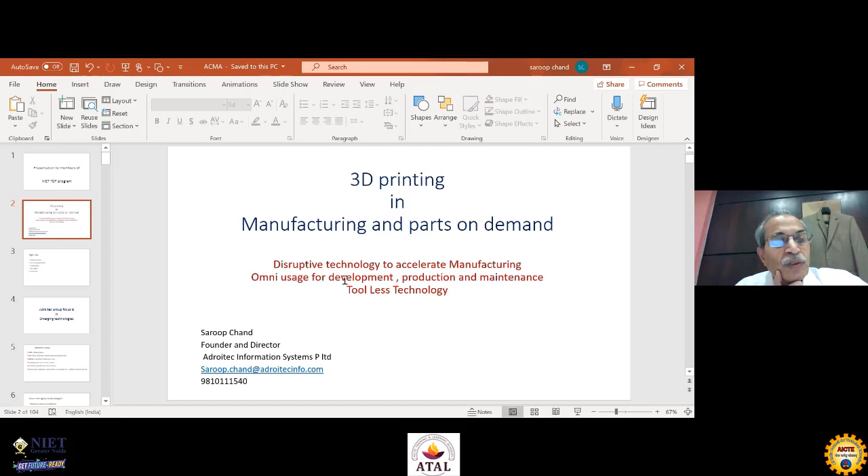So today's agenda, we will keep it as two slides on Adroitec, the 3D print benefits and why this technology has emerged, the technology by itself, use cases, and the different materials.

Just to give you a little background of Adroitec - Adroitec has been in emerging technologies, enabling customers to reap the benefit of new technologies and take a quantum jump in terms of growth. Today we are a team of about 300 people. We are a 30-year-old company, and we work from about 9 offices in the country, apart from 2 offices in Germany and the US.

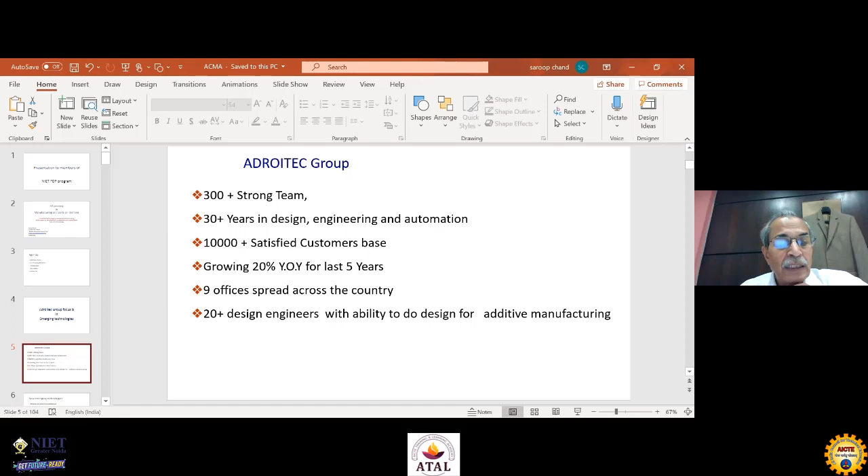Our areas of focus have been in robotic and smart manufacturing. Close to about 100 plus people work in the robotic and smart manufacturing area, where we work with companies like Ford, Daimler (Benz), and companies like GM for Opel, and some of the aerospace companies like Bell Helicopter, and Hardcore in terms of Space Application Center, India - all of them we work with.

We also have a full team which addresses the IIoT. In terms of hardware, we work with different PLC manufacturers as well as gateway manufacturers, and then work on software for ensuring that the protocols are robust and secure. We have even developed an IIoT server, so you can work on any web server like Amazon web server or Microsoft server or any of them. In addition, we can also provide a server by which the user can keep the data local, while also keeping it global.

We have been working in the IIoT space because many institutes find it very expensive to hire space on AWS or other web servers. That's why we created a facility by which the institute can create a server of their own, which can work as a global server and share the data so students can do projects in this area. We also developed 4 kits in IIoT for doing process plant, digital manufacturing, quality monitoring, and also a general kit so students can get experience in all these areas.

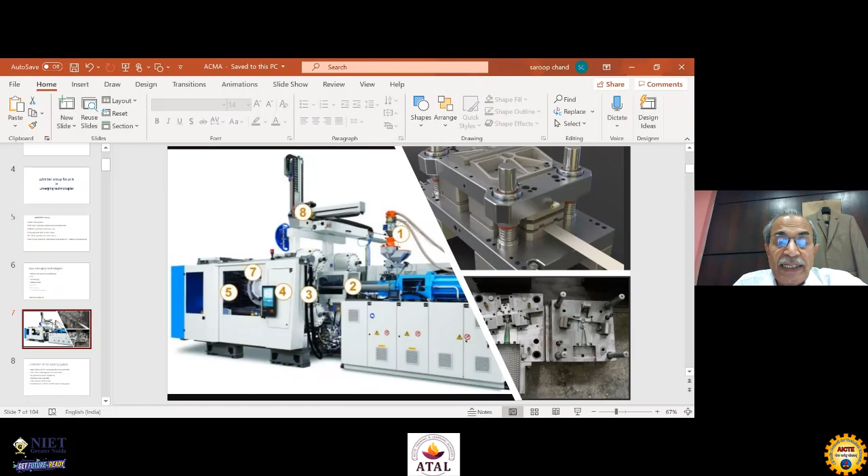These methods are very good for very large production quantity, but they are inefficient when it comes to small batch production, which may be 100, 200, 500 pieces - or it could not even be possible because the process is so traditional that in many cases it was not possible to manufacture or attempt lightweighting of the parts. So we will discuss how 3D printing is able to facilitate lightweighting, integration of parts, in addition to taking over the role of existing processes for small batch production.

The existing system also involved high capital cost for developing the die and mold, and practically I do not think you would have seen a factory which is less than 5,000 square feet where even a workshop is doing the manufacturing. Today in my office, I have about 1,000 square feet of area allocated only for 3D printing, and in that 1,000 square feet we are able to do production worth about 5 crores every year.

The lead time to develop the die and mold, setup time for part changeover - practically you had the minimum order quantity, trials and corrective action were required. Maintenance of die for the life cycle of the product was another big challenge, and they had to be stored.

Looking at the current need, the need is changing. The need is becoming more personalized. So there is a new word which has come in - mass personalized customization. So it's mass customization. Now the two words are opposite, but they are true - you need to address 100, 150, 500, 1,000 people, and the needs of the other group of 1,000 people is very different. Therefore you need to continuously do personalization, which means you need to modify your shop floor to be able to manufacture and deliver reliable product in a flexible and targeted system.

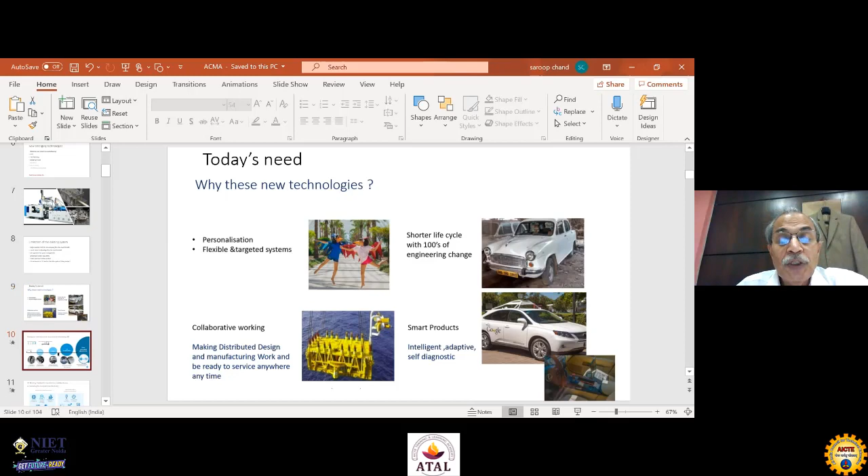With smart products, testing has to be done along with people specialized in different domains, yet they are putting the product together. This means my cycle time for 5 or 7 products to be launched has to be completed in collaboration with multiple streams of people, who may or may not be sitting at the same place, and the product may be serviced or delivered in a different country. All of this poses a big challenge in terms of supply chain, speed, and training people in repair of machines at different locations. So we have to reduce the whole time of prototyping, testing, physical working, and then launching.

That is called Industry 4.0. From the handmade and time-intensive system which started manufacturing, Ford introduced mass production and mass delivery with the same product being manufactured, no variation. There's a famous statement from Ford himself saying you can buy any color in my car range as long as it's black. That's what Ford did, which reduced the cost and improved productivity, but it was one standard product coming out.

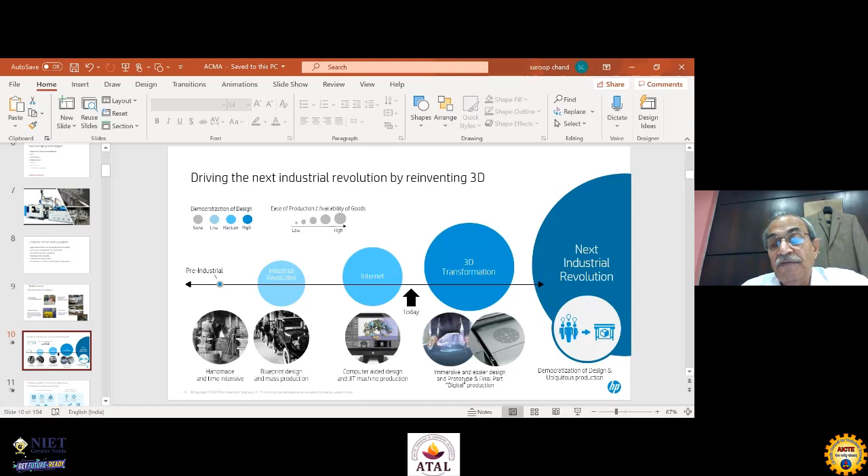Then came computer-aided design and just-in-time machine production, which helped in reducing cost and ensuring a little more flexibility. But today with smart products, it is changing to smart manufacturing, flexible manufacturing, which is leading to digital transformation.

All of this is being facilitated by tools like artificial intelligence and industrial Internet of Things, which can give us data related to the performance of the product from very far off places, and thereby we can build in more reliability in our products. At the same time, with so much data coming in from vehicles, consumer products, or machines, you need to store, analyze, and make sense of it to facilitate decision making. On the shop floor, to make it flexible manufacturing, we had no choice but to introduce robotics as a component of the flexible manufacturing system.

The fifth key technology is 3D printing, because with this you could print tools, jigs, and fixtures quickly. You could make prototypes, small batch production, and also produce spare parts for maintenance of equipment which has been supplied. It facilitates rapid innovation, and many of us working in colleges have seen a lot of incubation centers come up.

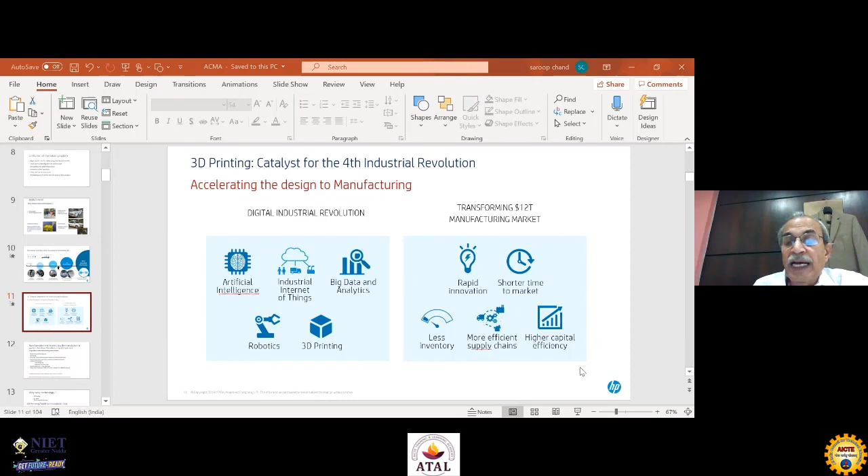At the same time, there's a more efficient supply chain built in, because you can transfer the data digitally and get it manufactured by a local manufacturer at that location. All of this adds to high capital efficiency as well as higher efficiency of go-to-market.

So in brief, it leads to reduced manufacturing time, no tooling, no minimum order quantity, trial of alternatives to get the most economic and efficient system, customized lightweight products, and integration of many parts—because now we don't have the problem of a tool or die hitting and compressing the liquid, where any undercut or overcut gets you stuck. But in 3D printing, since it's printed layer by layer and we're not removing anything, you can create very complex geometry as a single piece.

You can even provide hinges as a component, and by providing hinges you're able to integrate multiple parts. In fact, complex geometry is a big advantage in the 3D printing world.

Let's look at the trends. If we look at the trends, it's being used by motor vehicle companies, for aerospace, for industrial business machines, for consumer products—and I just attended and gave a lecture at the medical forum.

It's now being used practically across the whole medical stream, whether it's neurosurgery, dental work, or planning heart surgery—almost everywhere in medicine, apart from standard things like audiology, aligners, or prostheses, which in any case are being made using 3D printing nowadays, because every human being is individual—there's no mass-produced shape or geometry for a person.

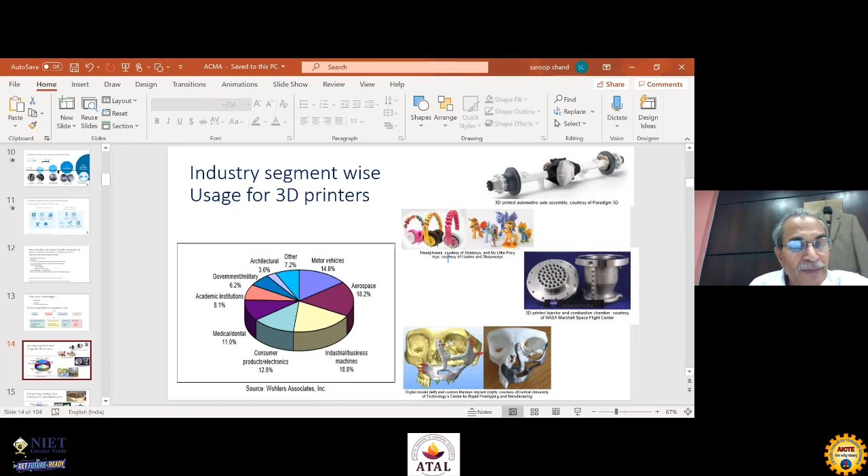It's being used for different applications. Typically, all of us know it for fit and assembly or presentation models. But now it's being used for patterns, for prototype tooling, and for patterns for metal casting, such as sand mold casting.

It's being used for tooling of components. It's being used directly as functional parts and as a visual aid.

You can see on the right side different examples of 3D printing, from a soft mold to a complex mold where the cooling channels are curved rather than straight lines. Previously, all channels used to be straight because drilling was the only process available, but no longer.

With 3D printing, you're able to bring the cooling channel very close to the part. And when you bring it close in a direct way, it gives higher cooling efficiency, and at the same time doesn't create uneven cooling, which used to lead to distortion in the shape of the parts.

Across the world, it's been adopted extensively. Even in Asia Pacific, if you see, it is same as North America. Unfortunately, India has been slightly slow in adoption, and we have less than 0.5% of the global market. But I think it's very soon catching up. China has adopted close to about 10%, and even in Asia, it is close to 3.2%, which means globally, India is only at about 0.5%, which is very, very low.

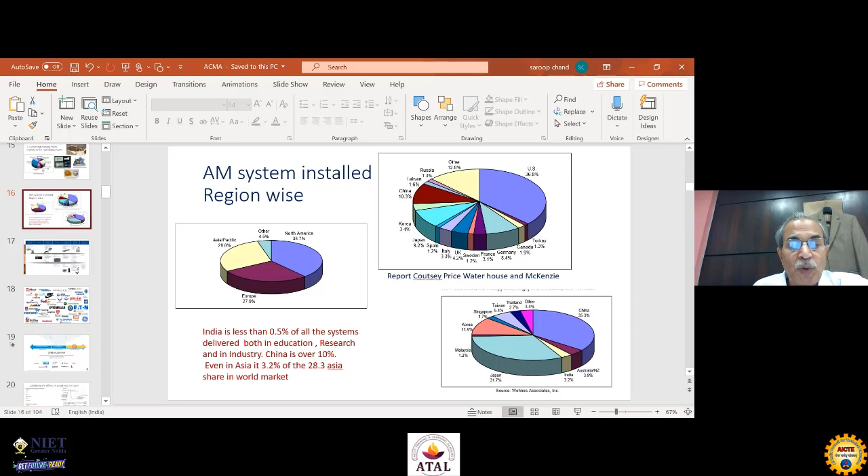Brief of how it is being used in different industries. It's being used in military and defense. So practically all drone manufacturers are today using the 3D printed parts because they are lightweight, they can be in small quantity, and they could be modified very quickly to be able to give the shape to the drone. It's being used for exoskeleton, for transferring the weight from the back to the foot, and it's also being used for many other areas in defense, for equipment manufacturing, equipment testing, because you can work with even material like titanium on this.

We are working on a project which is working on cryogenic system, and also a project where we are developing a silicone mixed clay by which you are able to take the temperature very, very high, and which could be used on the top of the missile as a part of the work.

It's being used in aerospace for making whole lot of jigs and fixtures. So a customer like Space Application Center is today using 3D printed all jigs and fixtures. The parts are not tested for flying in the air. It would take its own time, but are they capable of flying in the air? They are very much capable of flying in the air, but the process of testing and evaluation is a 3 to 5 years time. But at the end of 3 to 5 years, there will be plenty of usage of 3D printing in the aerospace industry.

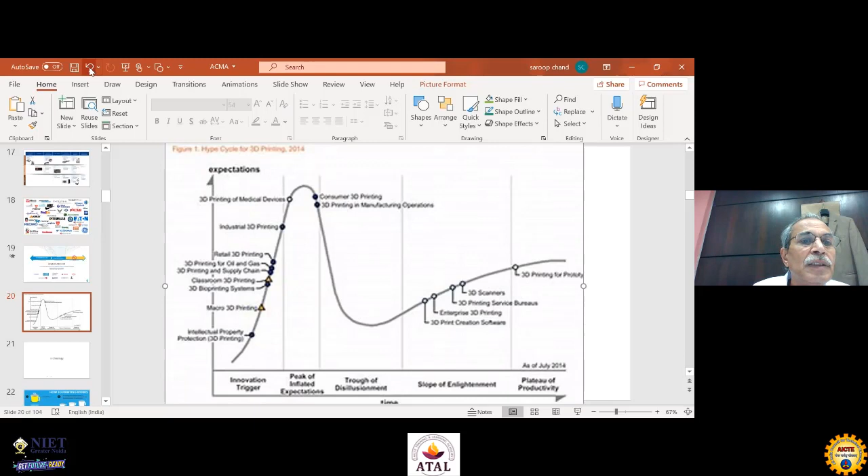So this momentum is not just because the 3D printing technology has grown. If you look at it, the hardware companies like HP, GE, DMG, Stratasys are all big companies which started doing 3D printing. Material companies like BASF, Henkel, Arkema, DuPont, Lubrizol, Evonik, and many more started developing material. Software companies said that 3D CAD is fine, but now we need to do design for additive manufacturing. And companies like PTC, Siemens, Dassault have all developed modules for design for additive manufacturing, which take care of the lightweighting, integration, and many other things which add great value in terms of a new process of manufacturing.

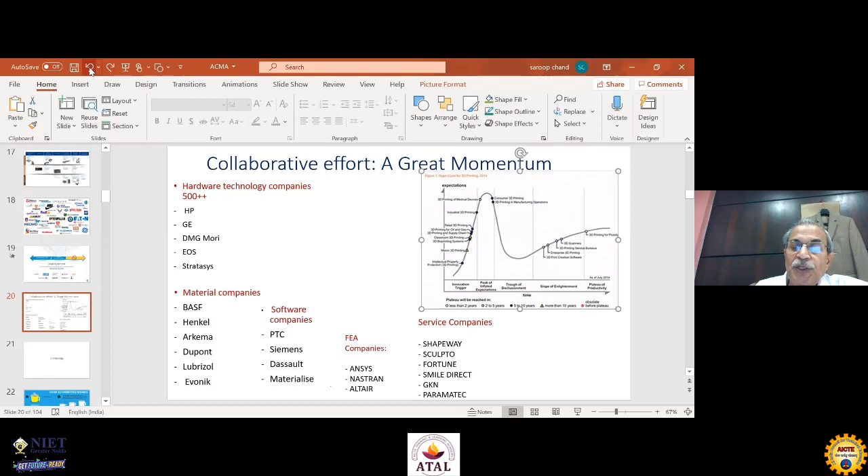FEA companies like ANSYS, Nastran, Altair started developing software, because who will do the simulation and check the reliability before the part is used in the actual sense? And like it happened with the photocopier, initially there would be a lot of support companies which would come in who will do the manufacturing rather than the end user buying the equipment, which is what has happened with companies like GKN, Shapeways, Sculpteo, Fortune, who have now invested in 20, 30, 40, 50 machines to be able to produce the parts for various people. Let's look at the technology.

So what happens is you print one layer and then the bed either goes down or the bed goes up on which the print has been done, and a new layer is printed on top of it. That new layer adheres to the previous layer, and since it attaches to the previous layer and in many processes it fuses with the previous layer, you are able to produce the part like a cup layer by layer and thereby create the product on which you can do post-processing, painting and things like that.

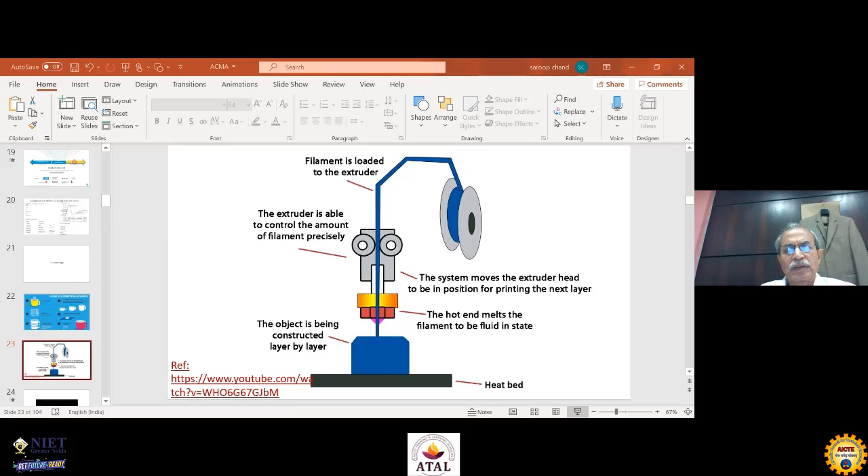Can you see the screen? Hello? Yes, sir. Yes, sir.

It is visible. Okay. So if you see the screen, there is a roll in which the plastic material, which could be PLA, ABS, HIPS, any of these materials, comes down, directed by the pinch rollers, and then moves down onto an extruder. This extruder is a heated extruder. So typically for a material like ABS, it would be heated to a temperature of about 270 degrees.

By doing that, you are able to melt this material which was coming in the form of a wire and then print it out. Now, when I say print it out, what does it mean? It means basically the model which was there, as you saw it in the form of a cup, when a layer is sliced, it is almost like writing it down on the previous layer, or in a CNC process, the G code gets created, and for that layer, the tool moves.

In this case, the extruder moves on the Cartesian coordinates to be able to extrude the material only at the places where the extruder is moving and thereby create the geometry. Let's have a look at it.

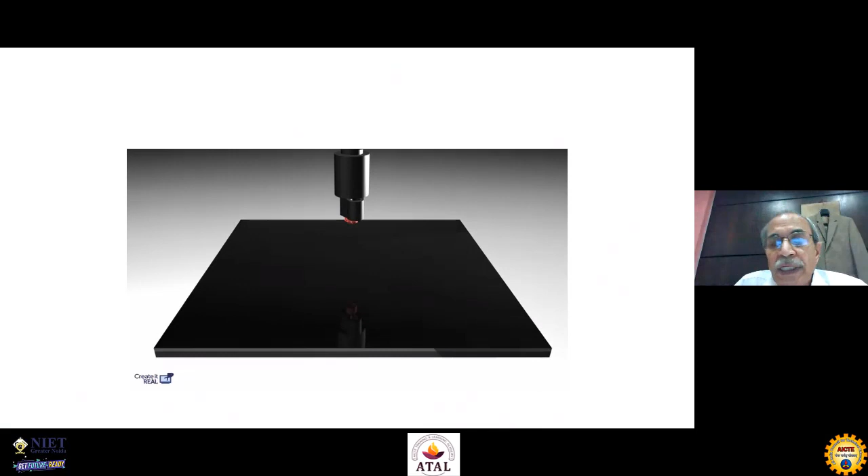In this, can you hear it? The voice? Yes, sir. Okay.

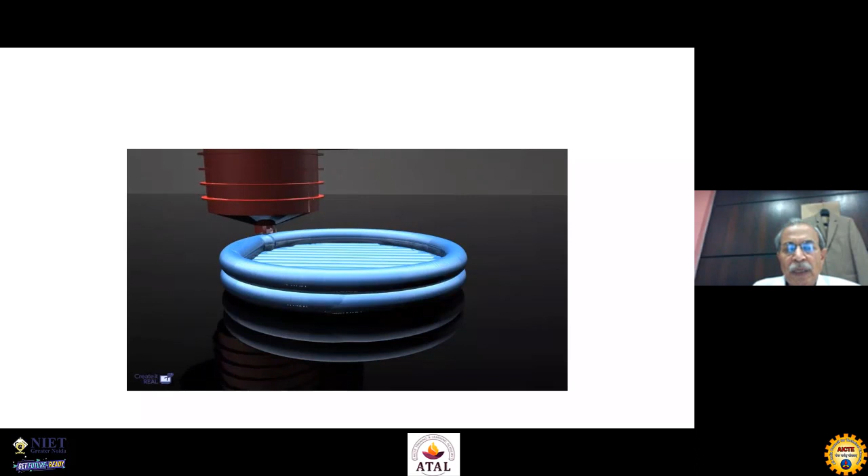So the plastic is coming down, melts, and you're printing it out one layer at this point. And you would observe the bed goes down, next layer. The orientation.

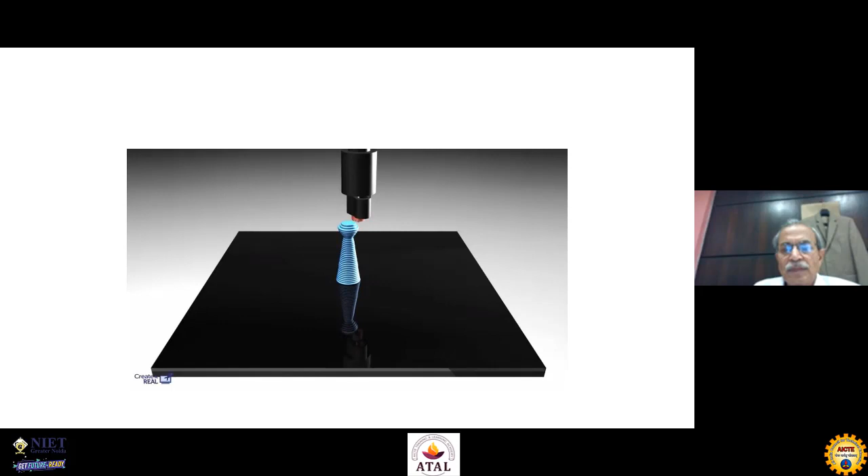So you saw the basic system. Now this was called the FDM technology. Now the Cartesian coordinate is critical. The extruder is critical. Some way of melting the plastic is important, or a metal. The same principle of layer by layer printing is adopted in all technologies. So 3D printing is nothing but layer by layer manufacturing.

So there is a second technology which is called SLA printing. In SLA printing, instead of moving the extruder on a Cartesian coordinate, there is either a mirror or a lens combination, and a laser or a light source comes in and hits the mirror. This gets directed, and this mirror is the one which gives the orientation so that the geometry or the G code can be followed.

So here you fill a tank with a resin, and this resin is photosensitive. So it can be cured as soon as the light or a laser falls on it. At that spot, it gets solidified. Otherwise, it's a semi-viscous material. So being a photosensitive material, it gets sensitized and thereby starts producing that layer at the place where the laser is defining, like a pen writing on top of the resin.

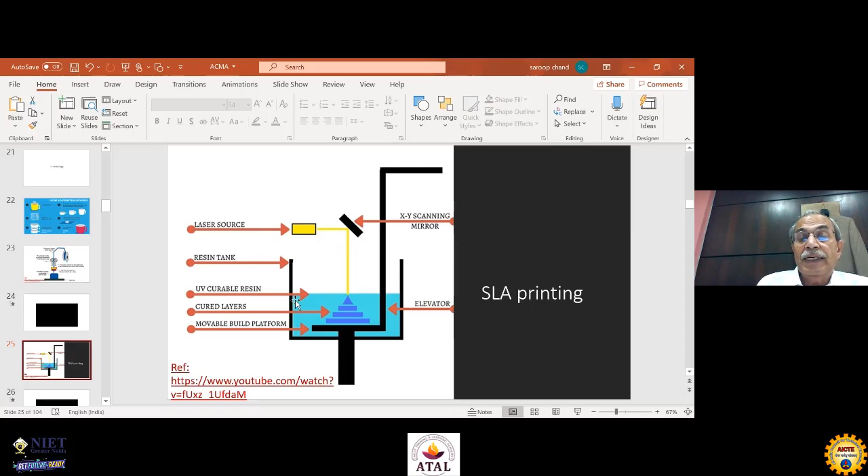So having done that, the bed either goes down or the bed goes up, and then you get the second layer and third layer and fourth layer, and thereby the product gets produced. Let's have a look at it.

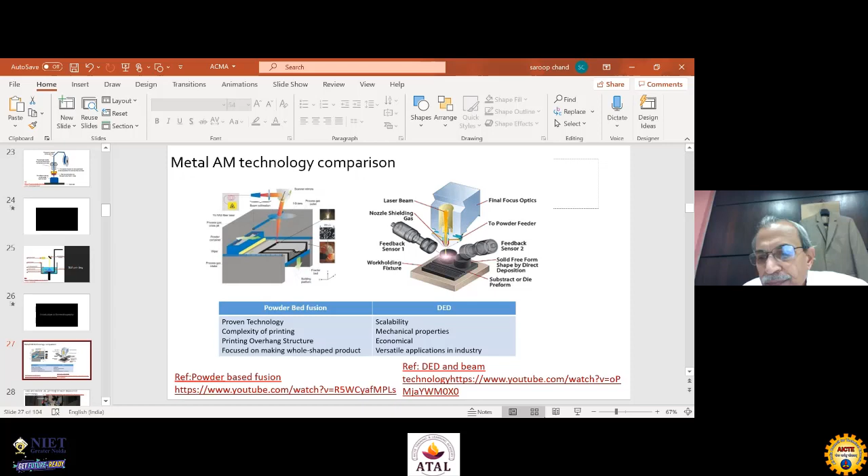Here you spread the powder on the bed, and this powder layer can be 50 micron, 80 micron, or even 10 micron thick. Then, as in stereolithography, the laser comes in, gets reflected, and creates a spot which hits the powder. Since the laser carries a lot of energy, it melts the material, whether it's metal or plastic. Depending on what powder has been spread, we use the laser corresponding to that, so it can be as high as 2000 watts, but typically you use 100 to 200 watt lasers. With that, you create the geometry on the powder bed, then the bed goes down, a new layer gets coated, and the same process is followed as per the geometry.

In this, the limitation is, one, maintenance of the laser is a bit of a problem. Two, the moment you have used one type of powder, changeover becomes a challenge, because you have to clean the whole machine since the powder has been spread all over the place, and that cleaning becomes a bit of a challenge.

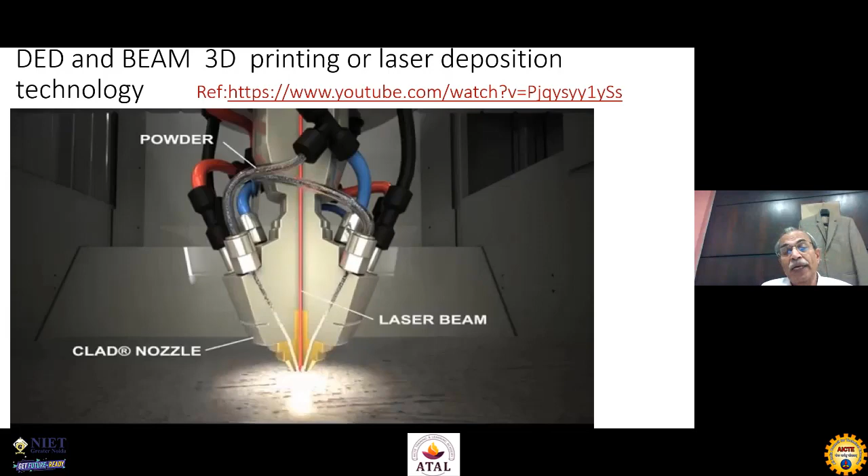In case of metal, you have to take a little precaution, because metals do get oxidized, and since they do get oxidized, you have to provide a neutral gas like argon or helium while doing the printing. In metal you need this, but in plastic you don't need it. So let's look at how it works.

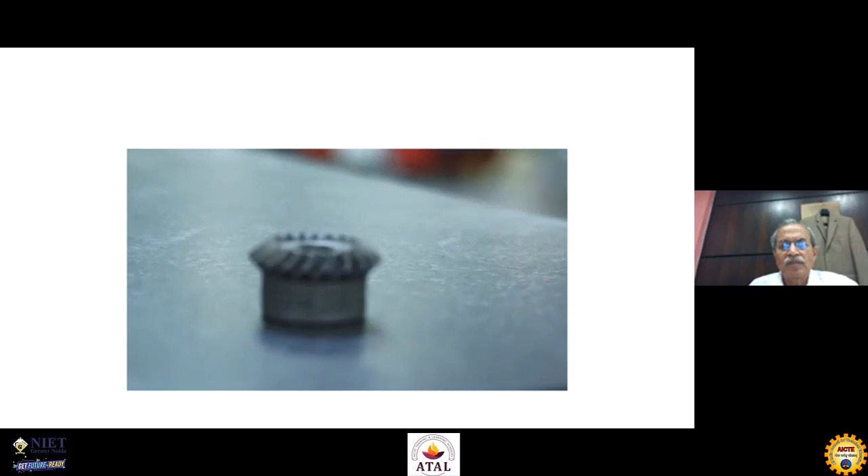But now it is being adopted and gradually moved to functional parts, and more importantly, production parts rather than only prototyping. So a company like HP, who launched the product about 3 years back, relooked at it and asked, what can we do with the laser? They created and used the technology they are best at, which is inkjetting. So they created about 15,000 nozzles on the bed like this.

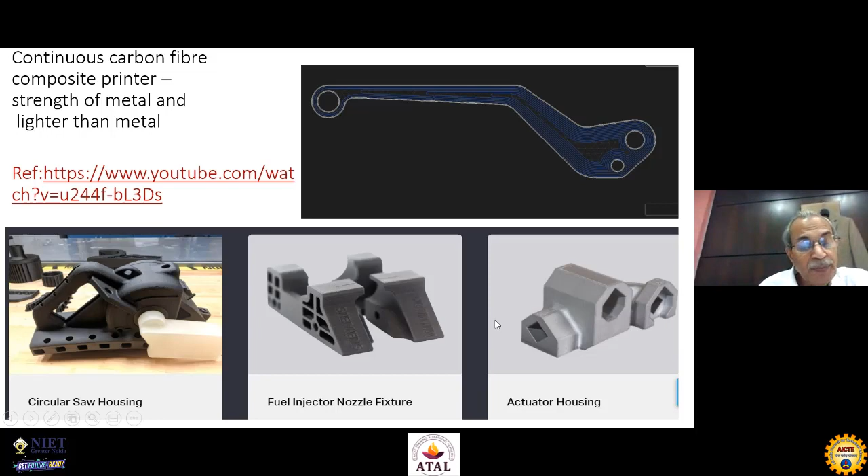In metal, the technology you saw and this technology becomes almost like a desktop setup. Here is a metal wire acting as a support wire. You saw the guy clipping it out with a clipper, or sometimes a CNC machine if the joints are very strong. But in this case, they do the printing on the bed like an FDM with the metal material and envelop it with a small plastic so the parts remain stuck. This technology is well proven in metal injection molding technology.

You normally put a small adhesive in the metal powder while producing the part, and that is called a green part. For creating support where there is an overhang, you would typically do it with either the same material or a different material. But in this case it's the same material, except between the support and the part there is a ceramic layer which gets laid. Since this ceramic layer becomes brittle when sintered and can be broken, all the supports can be removed without any CNC operation or hard work in clipping them out. So it was a marked improvement over what was being done in metal.

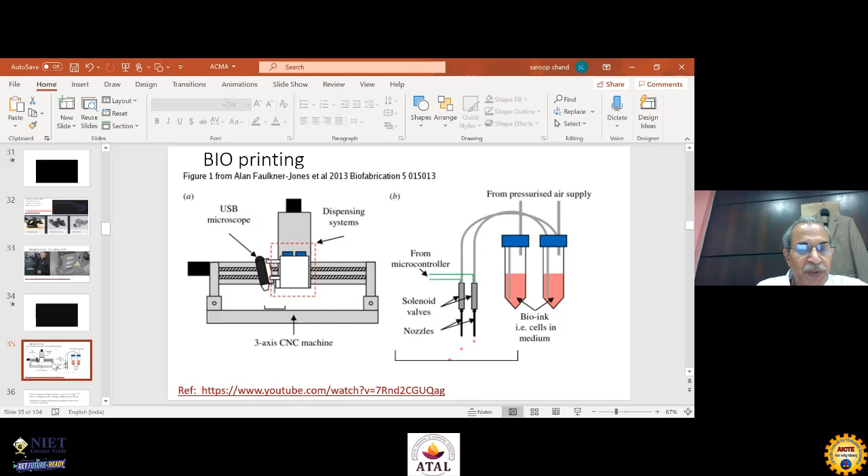We all know how the integration of mobile communication, computers, and internet led to the smartphone, and what a large market it opened—whether for app developers, manufacturers, maintenance people, or sales staff in shops, where a large number of people are employed around this new technology called the smartphone.

And when did it happen? About 15 years back. In that time, it created employment for close to 30 million people, 30 million youth having been employed.

Even you and I ask our son or daughter, who is young enough and experienced enough with smartphones, to help us use different apps. If it can create that much impact on employment, I think 3D printing, which is affecting a $16 trillion market—not a small market—will have a large scope for growth.

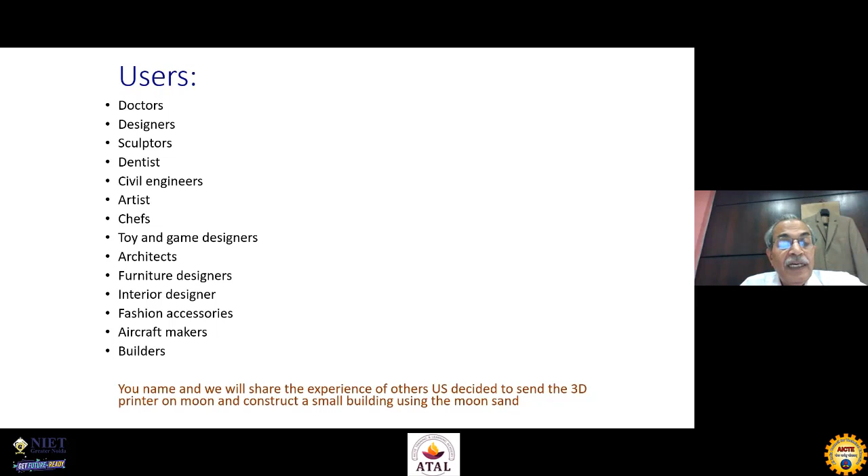So let's look at it - who are the users? Doctors are using it, designers, sculptors, dentists, civil engineers, artists, chefs, toy and game designers, architects, furniture designers, interior designers, fashion accessory designers, aircraft makers, and builders. And of course consumer goods and all those things. Take any example and you would find at least 20 people using it in that industry.

There are two bones, so you have one spare bone in the foot. This bone is cut precisely as per the shape of the jaw, which is personalized to every individual - no two people have the same jaw. With that cut, they are able to do the surgery. Previously, they had to do this after taking out the bone, cutting it based on measurement. Now with the CT scan, they can check it up, do the planning, create the fixture, so that as soon as the bone is taken out, they are able to cut it with the saw, and that is used for the jawbone replacement.

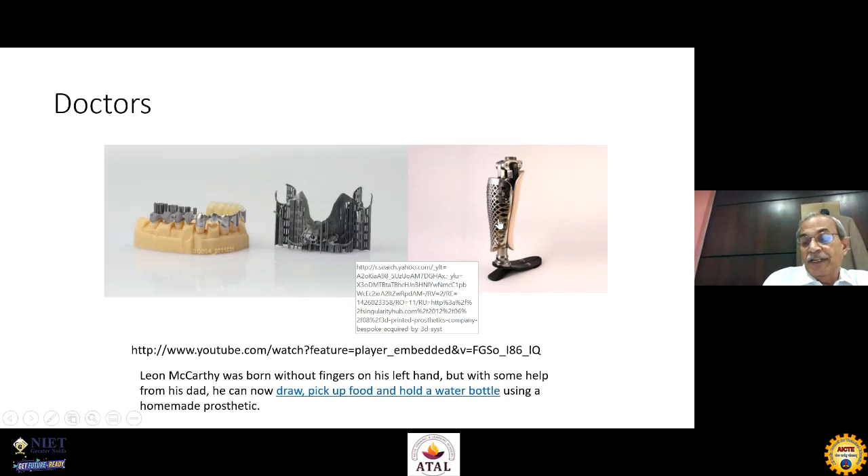Cake printing, I could do direct food printing using different types of material, including the dough, and using the syringe as my extruder, I can push the material and give shape to my output.

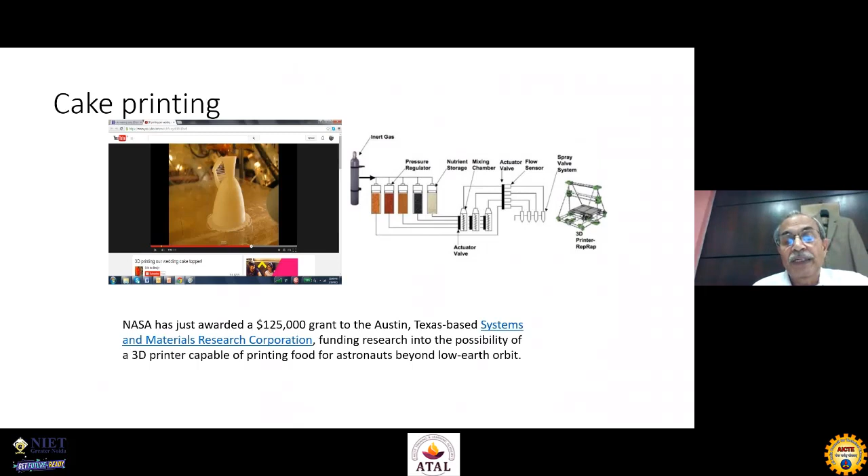Can I create my customized cups? Can I create my customized glasses? Can I create my spectacles or my child's shoe? All of it is possible using 3D printing.

Globally, it's being used by various sculptors to create the cast and then do the sand mold casting with the help of it. You have seen the statue of Sardar Patel. That was all designed by one of the artists, the sculptorist in India, and after doing the designing, the same was given for casting using the 3D print output.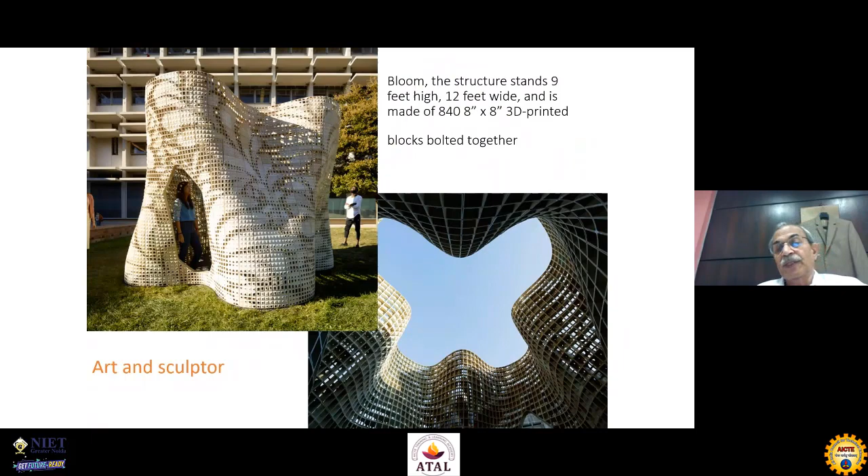Can I create my toy which is personalized to my child? Yes, I can, because I can scan the face of my child, use it for doing the 3D modeling, and after the 3D modeling, I can print it using a soft material like silicone, in color, and that becomes my personalized toy.

Architects have used it extensively for creating the model, sharing it with the client, getting approval rather than 2D drawings, and then talking about the different planes from where the person needs to see it. Typically, reconstruction in an architectural or civil world is close to about 3 to 5% of the expenses. With the help of 3D printing, they are able to avoid it because you are actually showing the miniaturized house or building or structure before the construction actually happens.

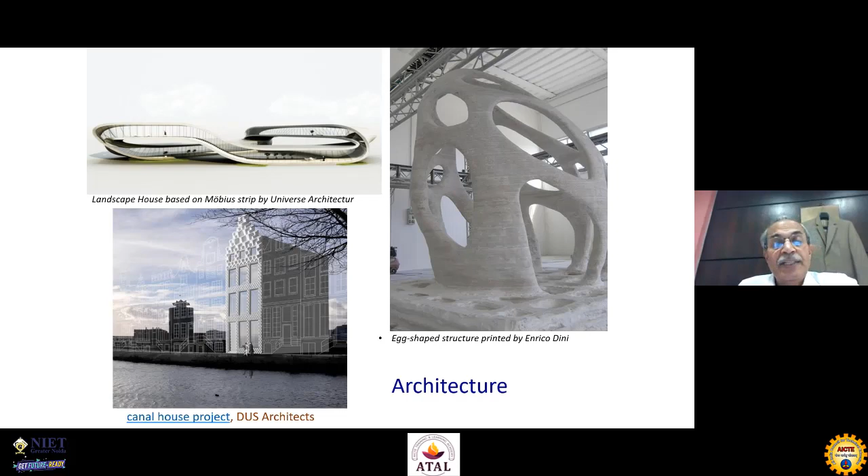So many of us have heard about a house which has been made in less than 3 days time, an 8 meter by 8 meter house, using the 3D print technology.

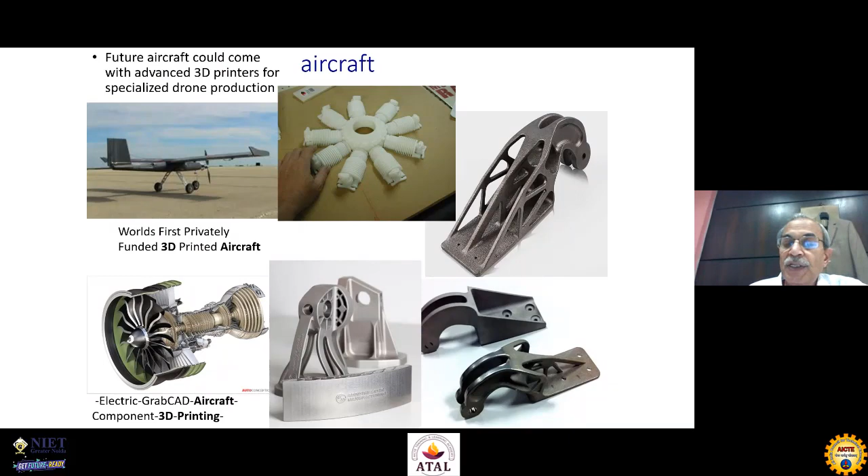Now, having reduced the weight by 125 grams, and if there are 300 seats and each seat requires 6 pieces of it, right? You can well imagine you're talking of 800 grams per seat, and 800 grams means 300 seats is close to about 240 kilos. 240 kilos means a whole lot of fuel saving. One of the companies which started using even the belt buckle or a seat structure like this was able to save close to about $100 million per year just by redesigning and reworking on the seat holding and the buckles.

Organizations like the National Institute of Fashion Technology in India, and globally various fashion designers, have started using it as an accessory developer — customized shoes, customized belts, customized rings, customized necklaces, and many other things to be able to define and give shape to their dreams. Some of the examples I'm sharing with you.

It's been a challenge for them to create and be able to present their ideas to the world, but with the help of 3D printing, you are able to do that. So there was a show which was done in Bombay about 2 years back, where all the clothes and all the accessories were designed and made with 3D printing, and a full fashion show was held.

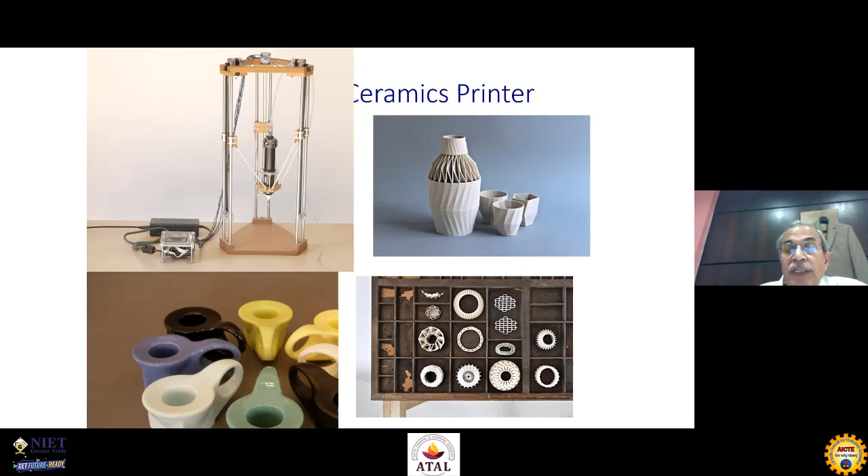You could use ceramic for doing the customized material and customized consumer products. Let's move to the industrial application. If you look at the industrial application, typically you would make a pattern using wood. Now, with wood, there are very few artists who can actually cut the wood in this shape, and that would have to be maintained for a long period of time because the wood absorbs water.

Using 3D printing, you could make it in PLA or ABS, and use it for casting applications for sand mold casting. Of course, you would have used the same sand remover and all those things to give it a finer finish. A panel manufacturer could construct the panel, fit it in and test the whole equipment with the help of 3D printing. Now, does it have to produce one piece by one piece?

No, it's not necessary. Our production machines like HP are able to produce a large volume of parts in one go, and not only one type of part, which was the limitation of the existing system, where you had to set up a die to produce one type of part. In this case, I could actually create a bed or a box with multiple parts of either the same type or of multiple types.

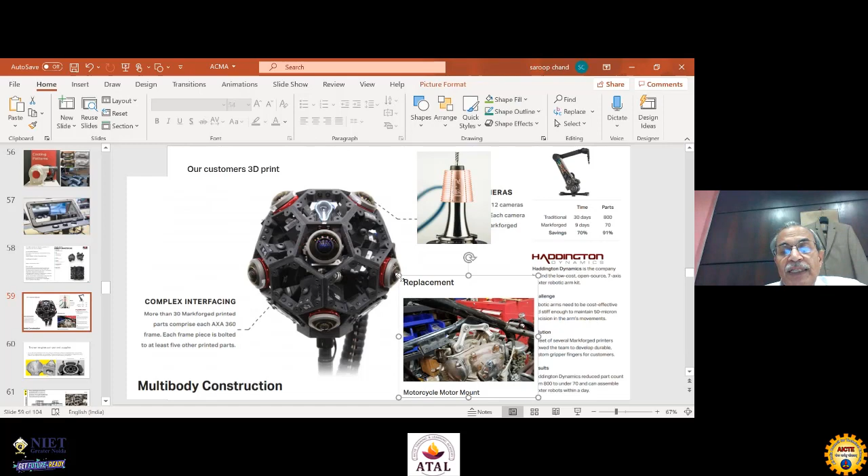So I'm sharing with you another example. If you see, this part was broken, and this could be made with 3D printing. Writing a CNC program would have been a challenge, right? You could make it in 3D in less than a day's time and use it for your repair.

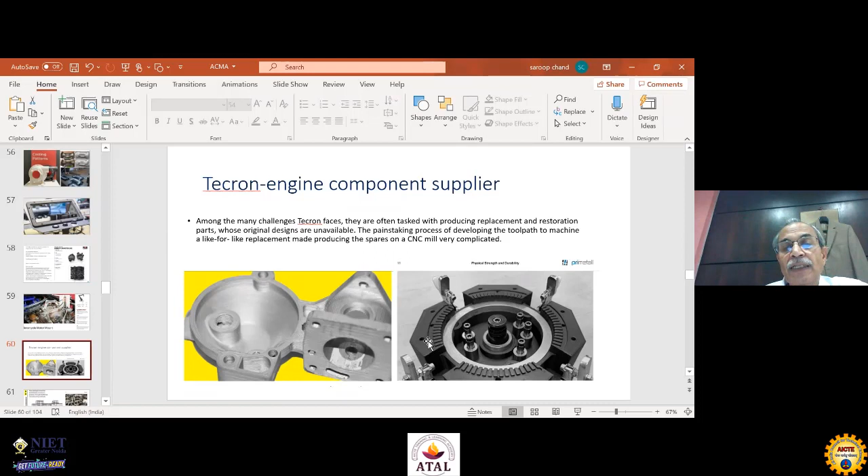Another example is a company called Tecron, an engine component supplier, which made the complete housing as well as the complete mechanism using 3D printing. They didn't have this part, they didn't have the CAD model, so they did reverse engineering, and after the reverse engineering, they could directly produce it with 3D printing rather than going through the CNC mill process.

Another example of flow, I will just reduce the size a little. Now, in this case, if you see, the flow tubes are at an angle. Can you do the drilling? You cannot. Can you change the flow direction? You cannot. So you would have cut it into smaller sections wherever the tube was bending, provided a seal, created a housing for that and joined it with bolt and nut. The whole process could be avoided because I was doing 3D printing, which gave me the flexibility of making the curved tube and manufacturing it as a single piece.

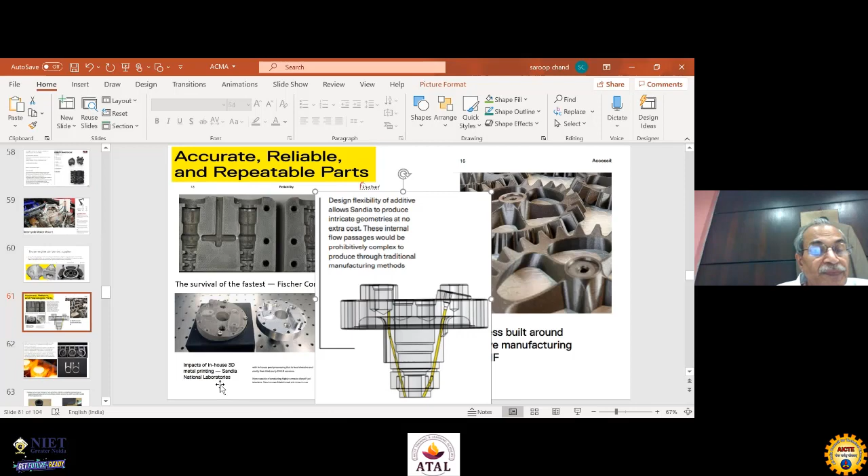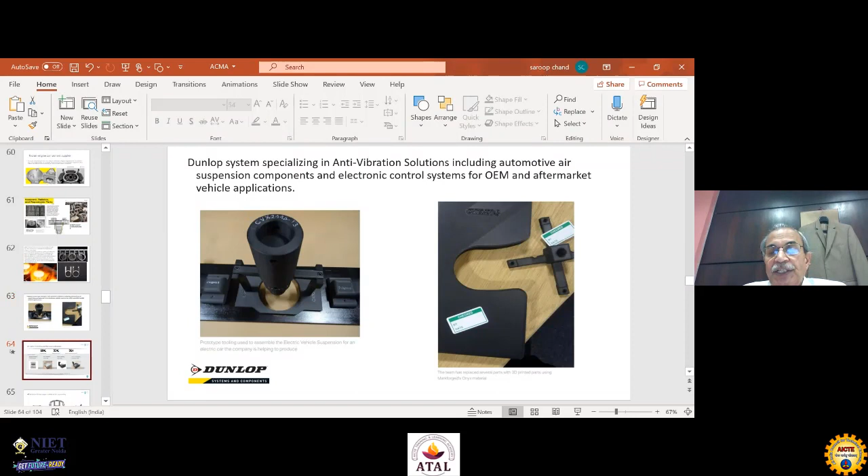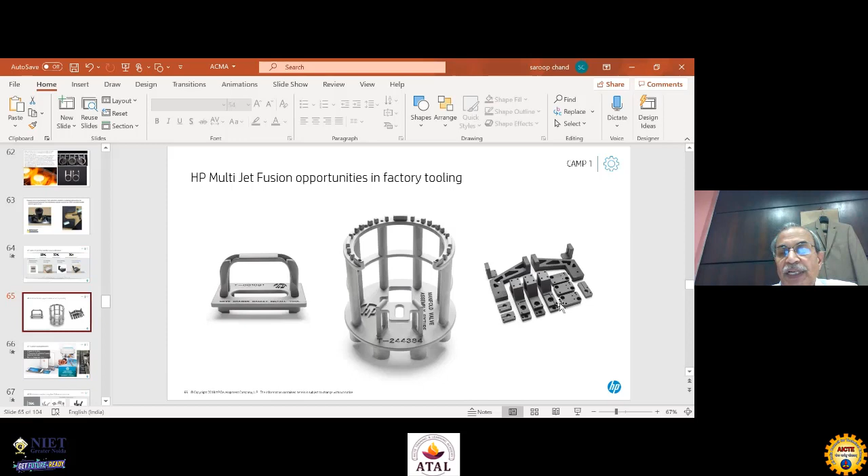So these are a few of the examples of integration of parts. Typically a part like this required all these components before the manufacturing could be done. Now it is a single part which is being manufactured. So, different examples I can share.

This was a shop floor example where the cartridge had to be manufactured, and these cartridges are of different types, and since they are of different types, they had to change. The changeover time was a very long time. They made the whole thing using a 3D printer, and they could put alternates of different shapes so that the cartridges could be assembled and worked upon.

Another example of integration of parts and changeover of the part from aluminium and stainless steel to a plastic part, including threading, boring, holes, could all be done. Look at a complex tubing arrangement which had 6 components and a curved pipe; it could be completely done as a single part as an assembly, and thereby reduce the cost significantly both in assembly as well as in terms of manufacturing.

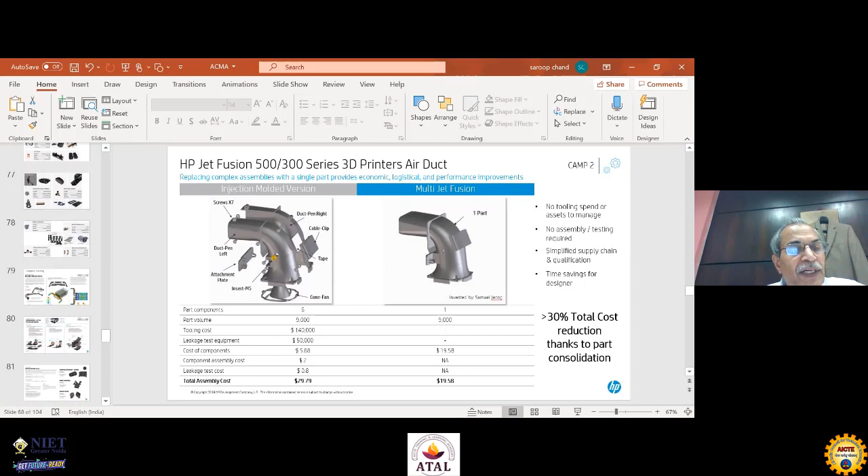I hope this gives you an illustration of how 3D printing can be used for different applications. I'd just like to take up a few more examples of a battery cooling system. Now, these are curved pipes of different diameters and shapes, which had to be made. I'm not changing the design, but I could practically make it in one go, a curved pipe like this, or an aerofoil, which would have been a solid part like this.

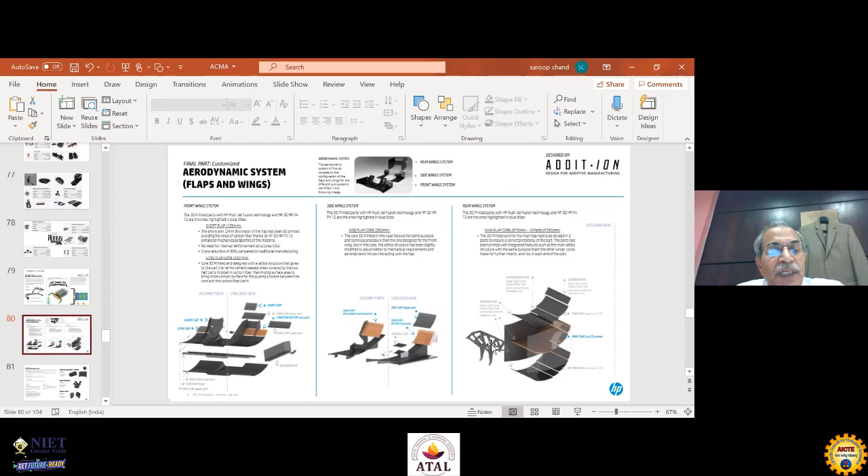If you see it in the brown color, what they did is that inside they made it a lattice structure, and with the lattice structure like this, if you see it on the right side, they were able to reduce the weight, which you would agree with me is critical for any application. Can it be used only in mechanical? It is being used extensively in electrical as well, and I'll share with you some of those examples.

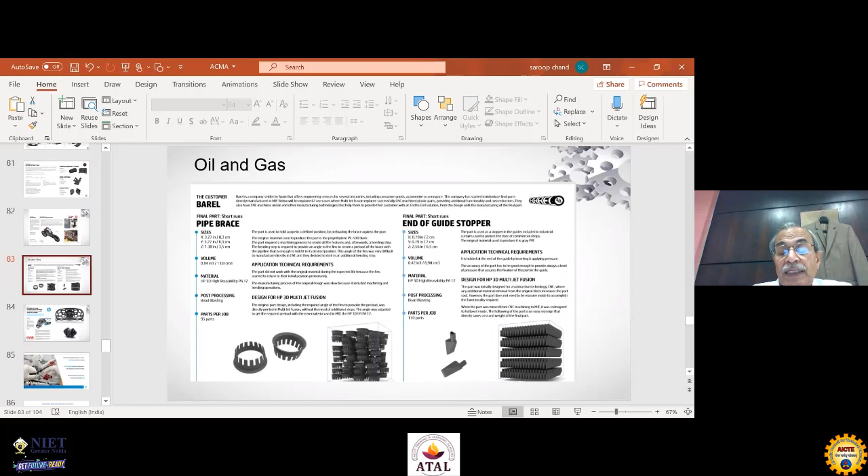A battery casing, oil seal. When you are doing the sealing, you need to put a cap, and the size of the pipe can be varying. You could make it. This is an example of a bellow being made using 3D printing, using a material like TPU, and creating the suction with which the robots work. Here are a few examples of the electrical.

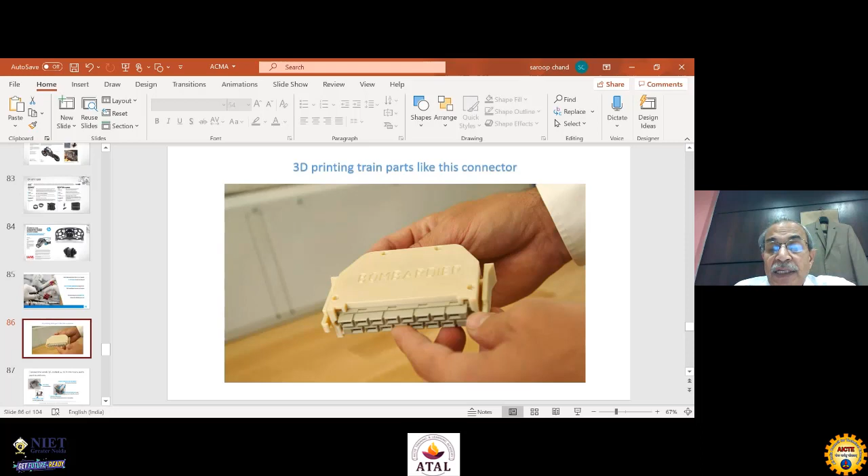Typically, these connectors are standard. Now they're great, but if I have two more pins, I have to provide another different type of connector. Can I make my connector and insert my pins in which my electrical conduction can be done? Can I write my instructions on top of it using a color printer? You could do that. Or you could even do the testing fixtures with inserted pogo pins, or the customized connector holders, or the routing fixtures.

Many of us do suffer from back pain, and we put on the belt as the best solution today. But can a support mechanism like the girl is wearing be created, which would hold my back straight and would be far more comfortable, and will also ensure that the right amount of pressure is applied? This is an example of a biomedical application.

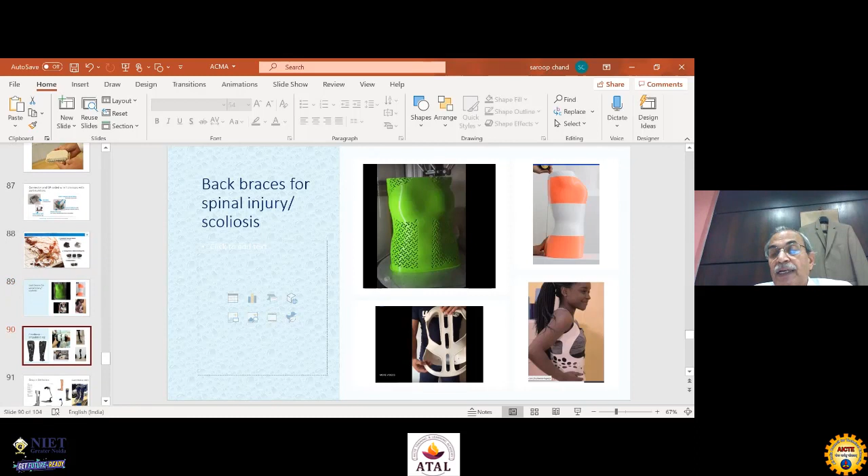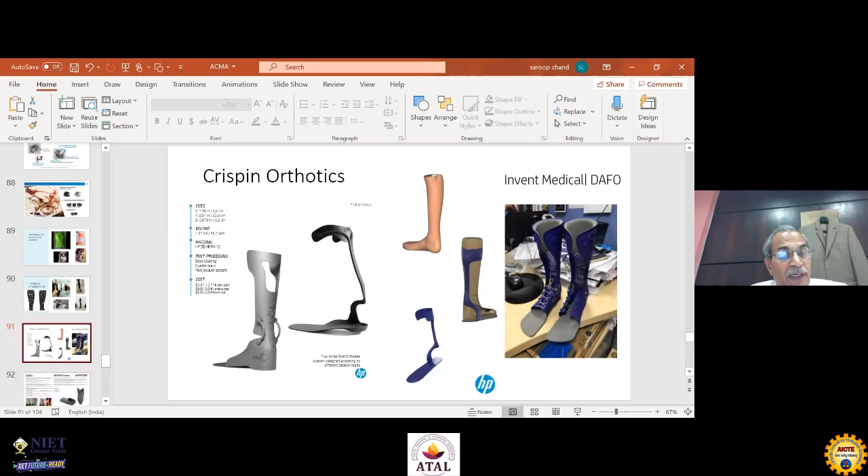Same way, can I use the prosthesis for amputated legs using the 3D printer? These are a few of the examples of how the ankle joints or the knee joint or the complete leg replacement can be done. And they can be very interesting projects in your college with the various students as well.

The world of braces on the teeth for correcting has been replaced with aligners. And so using the oral scanner, you do the scanning, create the 3D model, create the plan for correcting the teeth. And instead of visiting the doctor every time, today you can actually make clear aligners with the plan which has been done, and these can be inserted on your teeth, and therefore they can be removed while eating the food. Therefore it becomes more comfortable, and subsequently or in the night you wear it for the correction of the teeth.

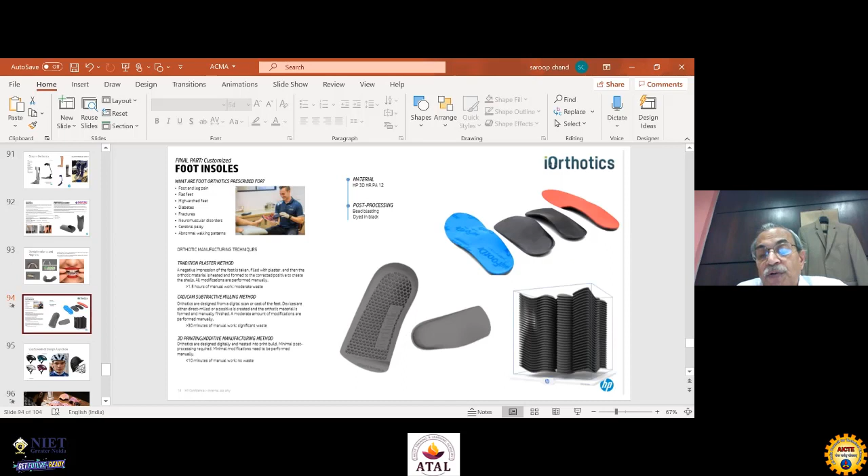Many of us have flat foot. Can I make the customized sole which can help me in overcoming the limitations of the flat foot? It's being done, and if you can see on the right side, I'm able to make about 60 patients' foot of different shapes simultaneously to be able to work on it.

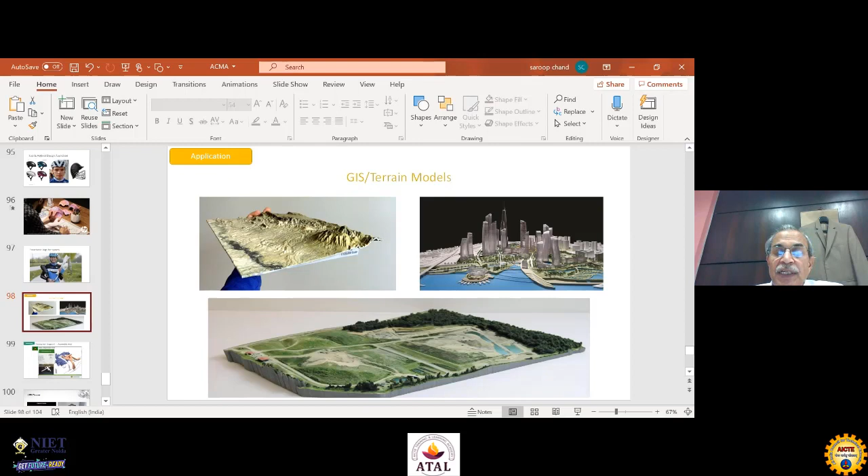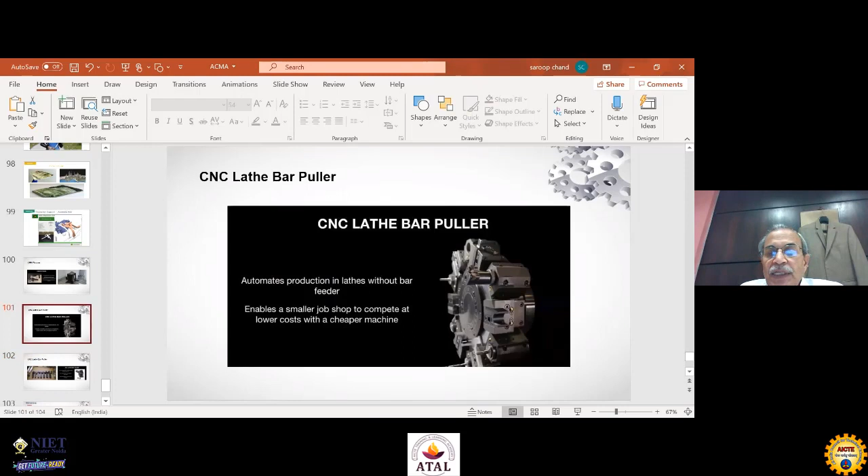Paralympic or other examples. This is a very interesting example of a civil engineer who is using 3D printing for doing the terrain modeling, both for the smart city and defense, using it for strategic wargaming and planning. So I just shared with you a whole lot of examples, and I can keep going on. So I thought that I will touch upon some of these examples and then have a discussion on it, whether it's a CNC lathe bar puller or it is the fixtures for the CMM machine. You could do all this work with the help of it.

Now coming to the material, can it be printed in metal? Yes, you can print in 17-4 stainless steel, Inconel, tool steel, pure copper, titanium, and many other alloys. Similarly, you can use plastics of different types, including PEEK and polycarbonate, which are high density and high temperature plastics. Composites like carbon fiber, Kevlar, flexible material like silicone, rubber, sugar, clay and ceramics like alumina, zirconia, porcelain, and gel, and including wax or any other material.

So in summary, 3D printing is accelerating the design to manufacturing of the prototype, pre-batch production, spare parts. There is no MOQ, there is no inventory, there is no tooling. The more complex the geometry of the part is, it's a bonus. It helps in optimizing the design for weight and for reliability. It also helps in efficient supply chain with complete de-risking because you are no longer holding the inventory, and low capital cost to try alternatives.

It's a great tool for educational institutes and for the students who are doing projects and the teachers who are trying to create models which they can use to explain the concepts. For both of them, it's an ideal tool because they can use customized models which can help them in explaining an assembly or disassembly of the system. It's being used by various physics teachers to explain the concepts. It's being used by applied mechanics teachers. It's being used by electrical people. It's being used by agriculture people. Very recently, we also worked with biotissue for agriculture.